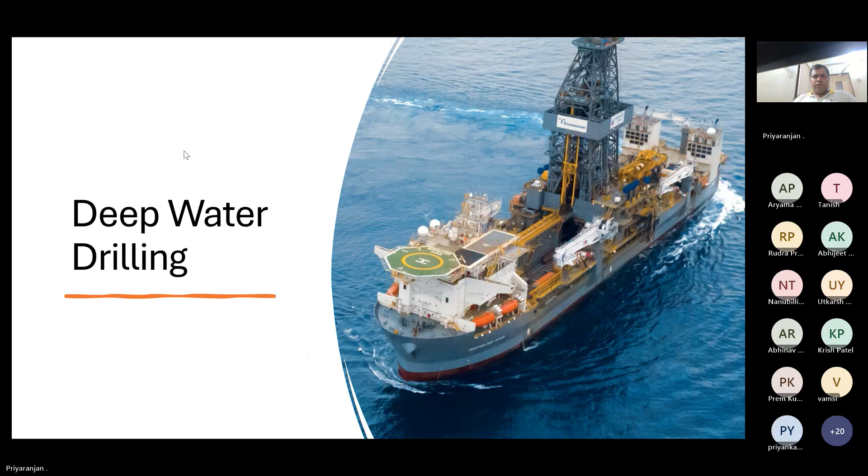So types of drilling rigs. Basically, deep water drilling is more about the rig. The rig itself is something to explore. The types of drilling rigs: we start from the land rig, then drilling barges, then we have jackup rigs, semi-submersibles, and drill ships.

So jackup, drilling, and the land rig. Jackup and land rig are both fixed structures. So we are drilling from a fixed structure, from the land or the jackup rig, and jackup rigs are sometimes attached to the platform as well. A well from a jackup rig and a land rig are almost identical, so there is not much difference between a well drilled by a jackup rig and a land rig.

But there is a limitation with the jackup rig: it cannot operate beyond 500 feet of water depth, because you cannot have so much length of legs of a jackup rig to get support from the seabed. So when this limitation comes, we go for the floating rig. With a floating rig, we have the option of semi-submersibles and drill ships.

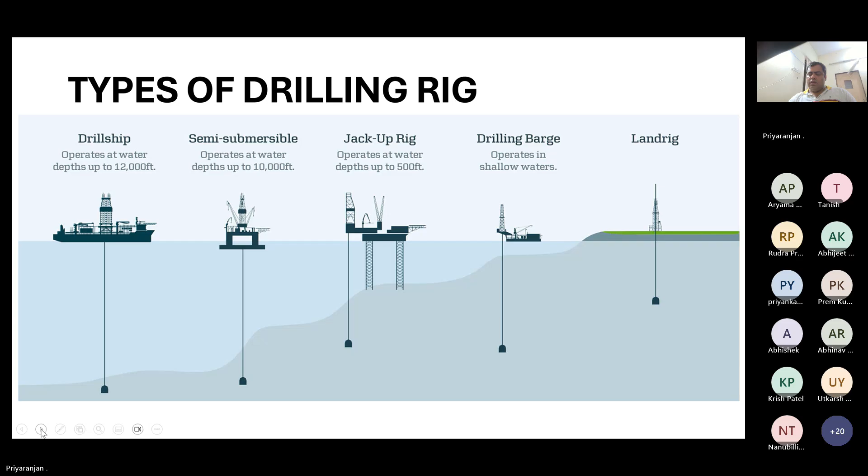So when you go for a floating rig, sea state is not something static, right? Sea state is always in some motion. If you have gone to some beaches, you must have seen the tide and the regular waves that come on the sea beach. So you can see the sea state is not steady always, and with tide also the sea level changes.

You know there is high tide and low tide. So if you have a floating structure on a seabed, that floating structure will not be static. In high tide, it will be at a very high level from the seabed, and at low tide, it will be at some lower level. So it is never at mean sea level, right? That mean sea level is something in between the high tide and low tide.

The tide changes with time, but tide is a gradual thing—it will change over like 5 to 6 hours of the day. But beyond that, one is tide, and after that, whenever the ship is floating, you have the heave motion of the ship.

The heave motion is very predominant, and for this only we have to make so many arrangements for drilling from a floater rig. Heave motion is the motion in the vertical direction—you can see the up and down motion. So heave motion is a continuous motion. Whenever the floating rig is at the field, it is moving up and down continuously. And if you have a well at the seabed and your ship is moving...

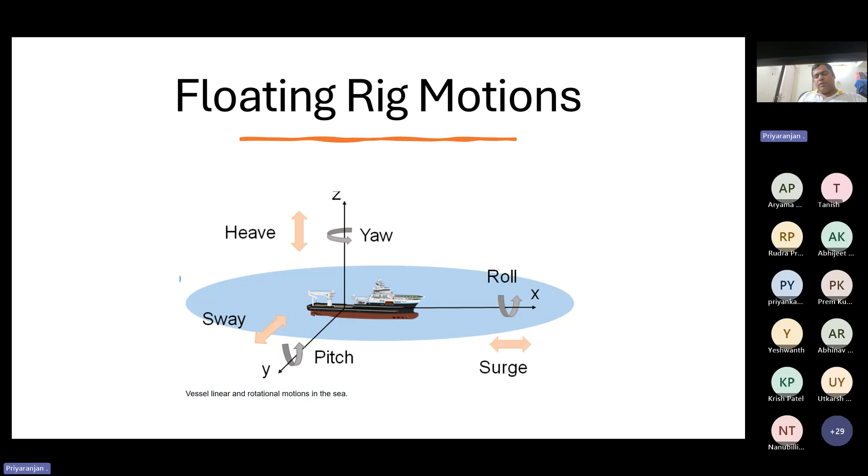Okay, so station keeping for floating rig. In a sea, you always have sea current and wind. So if you just have a ship on a seabed, and if there is a very strong wind, that wind itself can push the vessel away from the position. So to hold that rig in position, because we are drilling at a single point, the well at the seabed is like a single point where we need to be centered. So that is a very tight requirement from our side.

So to keep the drilling rig in a static position, we need to have some forces which can hold it tight. So there are two methods for station keeping: one is anchor moored and another is dynamic positioning.

For anchored mode, we have anchors in place, like solid ropes and chains tied to the rig, and that is called the anchor moored rig. The other is dynamic positioning. In dynamic positioning, you have thrusters that are constantly running, like a fan with a motor, and that gives the force to keep it stationary.

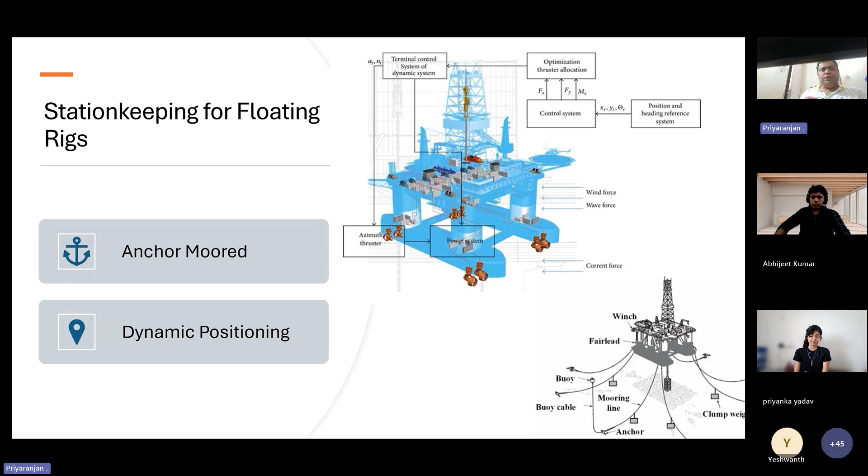Okay, so this is just a video from YouTube. Just let me know if the sound comes through.

Sir, the sound is not coming. I think there is some issue with sharing. Sound is not coming now. Okay, I will reshare it.

It's not asking me also. Okay. I will try once again. Let me know.

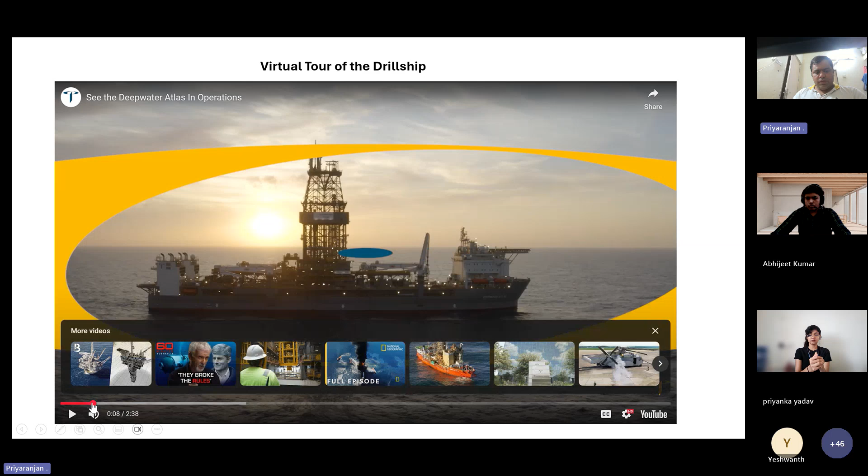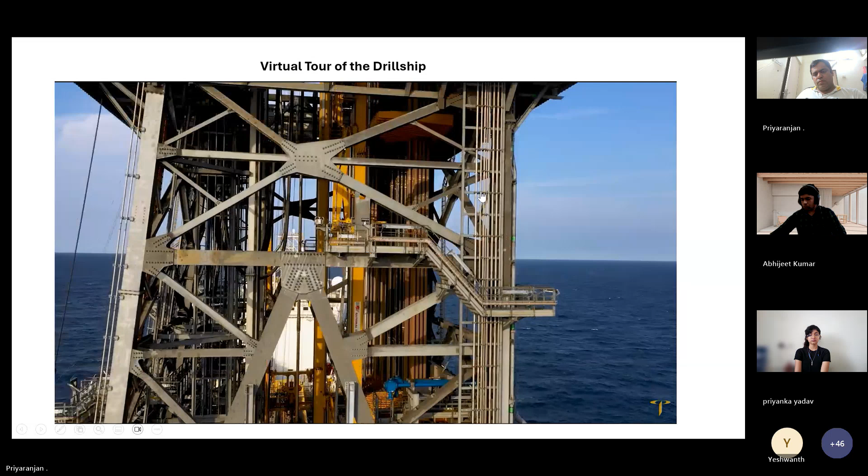Yes sir, it's perfect. I think the anticipation is finally over. You were excited to get on location and perform your job, do what the ship was built to do. The Deepwater Atlas, really special ship, the first of her kind, 8th generation. Things a lot of people know, the 3 million pound hook load, the 20K. You've got excellent power generation, so really it is the best, most advanced stuff in the world right now.

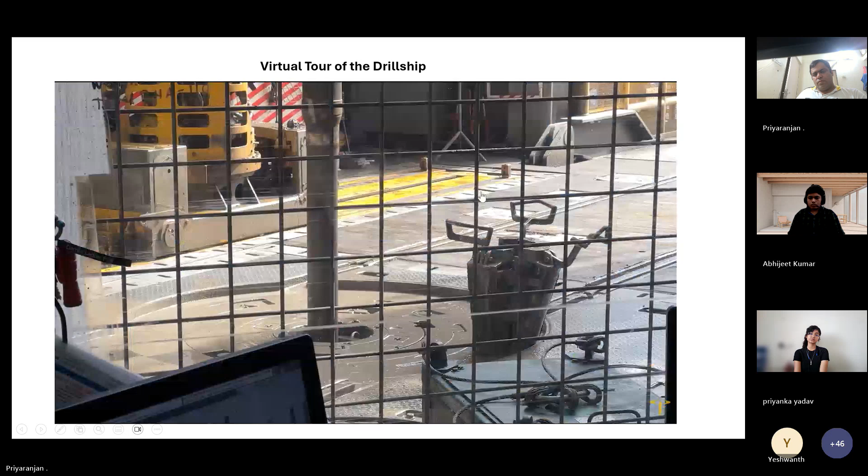We're currently on the Shenandoah project. Once we finish these 4 wells, we'll swap out BOPs and come complete them with our 20K BOP. First in the industry, gotta lead the way.

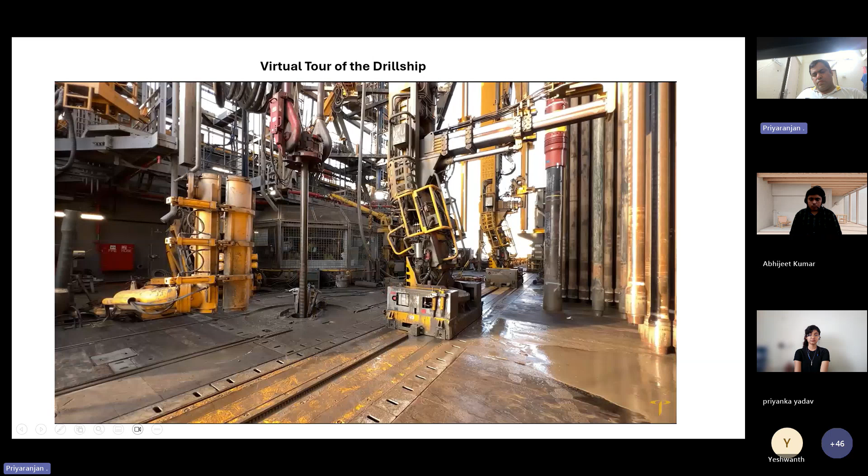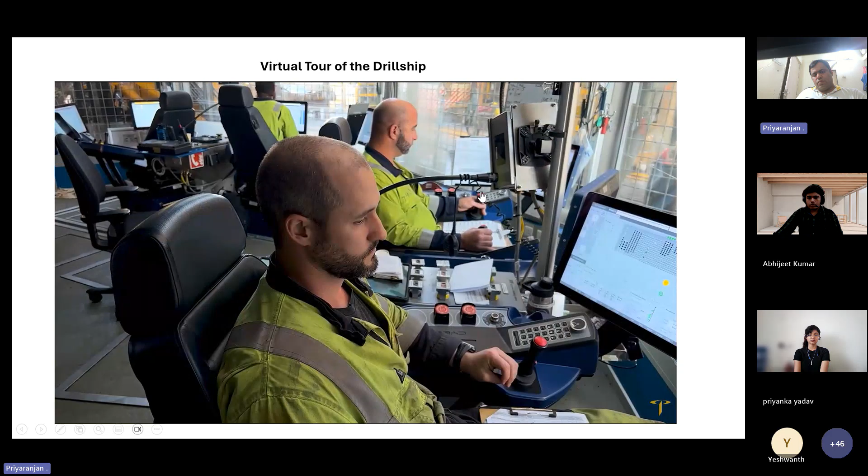It's just really rewarding to be part of it early, before it left the shipyard, and then coming into operations, you can see what the ship can do and really put your hard work to purpose now. It's a real good feeling to actually put it to work and see the years of hard work. There were years of work before we got here, and to see that come together and see the pride that people have in it is really cool.

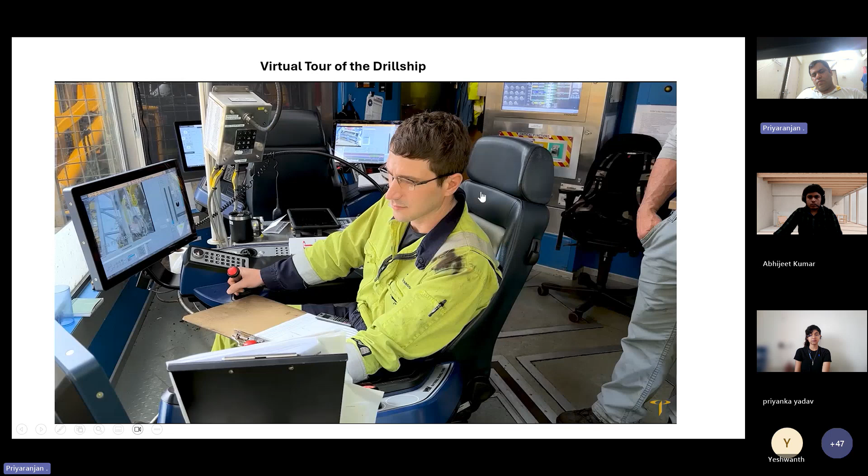You should take a lot of pride in being what is referred to as a plank owner. You were one of the original crew members when it came out of the yard. To see it operate the way it's supposed to run is, yes, very... you can always look back and say, I did have a part of that.

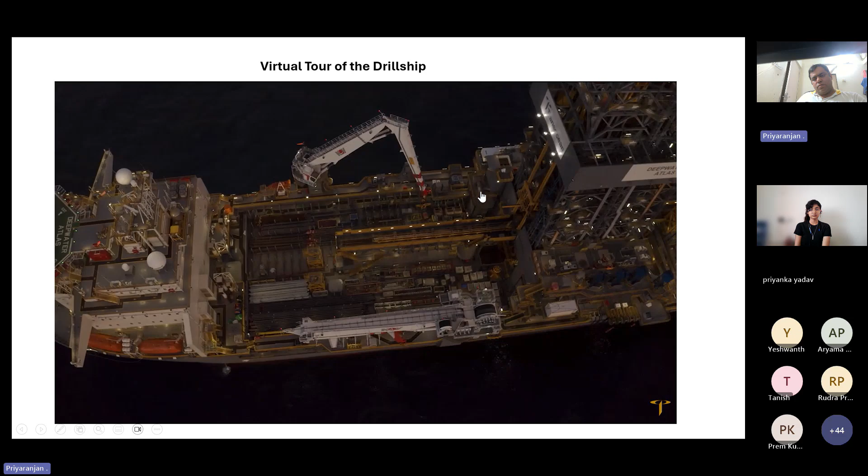A new rig, it's not like a new car. It's not like you pull up, drive it off and show it off. There's a lot of work into it. You can have all the technology in the world, but it takes the right people to really show it off. And I think the Atlas has that right people.

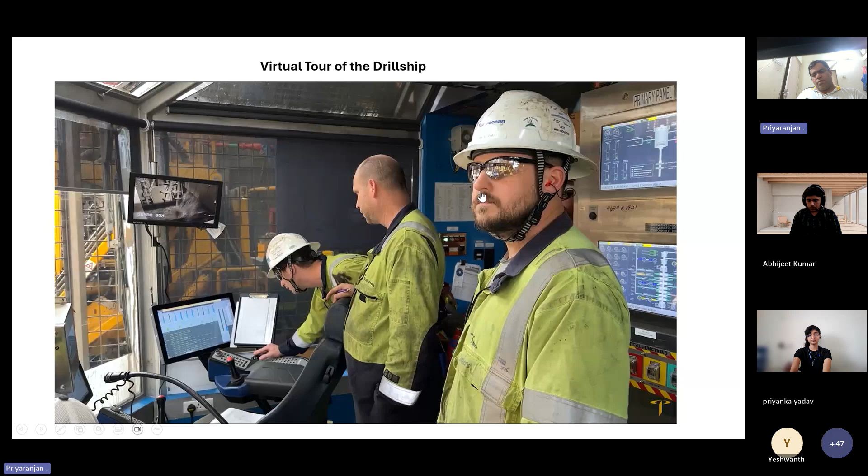The camaraderie of everybody working together, and when I mean everybody, I mean from the engineering side to the drilling side to the marine side. That's a big thing about the Atlas right now, and I'm very proud to be a part of that. I think we have absolutely assembled a team that's procedurally driven, safety oriented. I couldn't ask for a better crew.

This is our ship. We work for the best drilling company in the world, and it's our time to shine.

Okay, so you can have an initial look of a drill ship, right? In the previous video you could see some view of a rig, how it looks like offshore drilling rig. You might have seen a land rig, but going offshore itself takes many trainings. So before you come into the industry, you cannot actually go on a drill ship, because going offshore you need some training.

Only then can you go offshore. So you can watch some videos and be familiarized with what deep water drilling is. And if you see, deep water drilling is using the best of the technology. All the information is available on the internet, but the only thing required is time. So I believe that is why I am here, to give you some idea of how deep water drilling is working. Okay, so this is a description of a rig.

A deep water rig, and you can see for a rig the basic equipment, the core philosophy is the same. We have to drill the hole from the subsurface, from the earth, remove the cuttings and deliver a usable hole for hydrocarbon production.

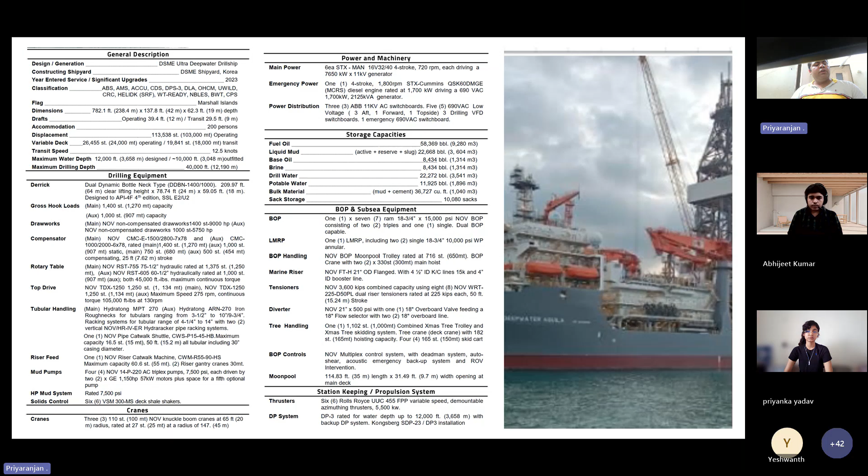Okay, let us move ahead.

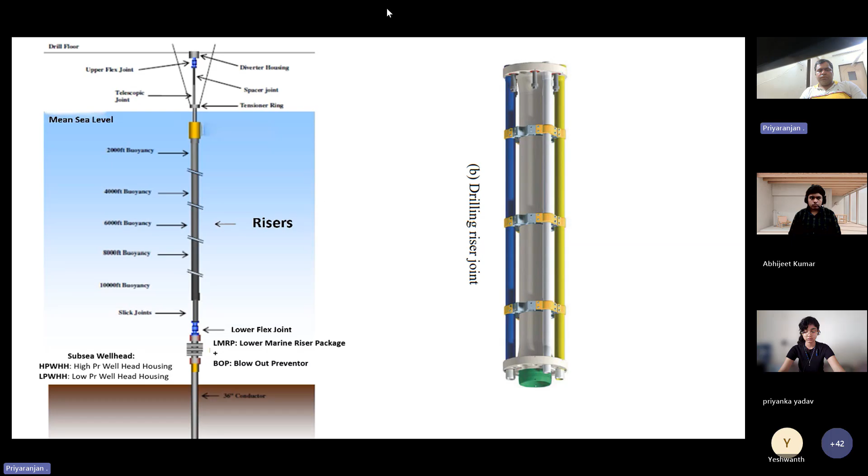So have you seen any land BOP? Vijit, you can answer. Have you seen BOP, blowout preventer? Yes sir, the onshore ones we have seen. Onshore ones you have seen, right? And this is the subsea BOP.

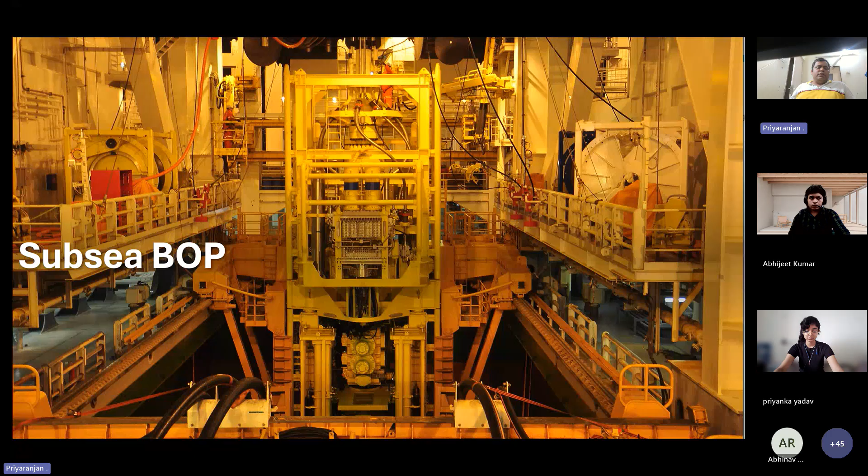And from that to that opening, all the operations of running BOP and risers happen. So right now this BOP is at the cart, and either it will be moved to the center and a riser joint will be connected, and then with the riser joints it will continue to be lowered. So this is a subsea BOP.

Okay, and what are the functions of a BOP? You already know what the BOP does. So the BOP, in case of any failure of the wellbore barrier, like if the hydraulic fluids are not able to hold the formation from coming inside, then we have to close the BOP. So that is the normal function of a BOP.

But other than that, there are other functions as well in the BOP, specific to the subsea BOP. So there is one emergency disconnect sequence. There is a button on the rig floor, and even at the tool pusher office, and even at the bridge. The bridge is the central command of the drill ship, the marine side of it. So from the bridge also, if the captain sees any problem, they can initiate this emergency disconnect sequence.

So the emergency disconnect sequence is manually activated, not automatically activated. A button has to be pushed, and if that button is pushed, the disconnect sequence starts and the wellbore is secured and the LMRP is disconnected from the BOP. There can be many situations where we have to push this button, and the EDS sequence is specifically decided based on what kind of tubular is in the hole. You will learn that later. But first you just need to understand that there is an EDS sequence, which we call emergency disconnect sequence.

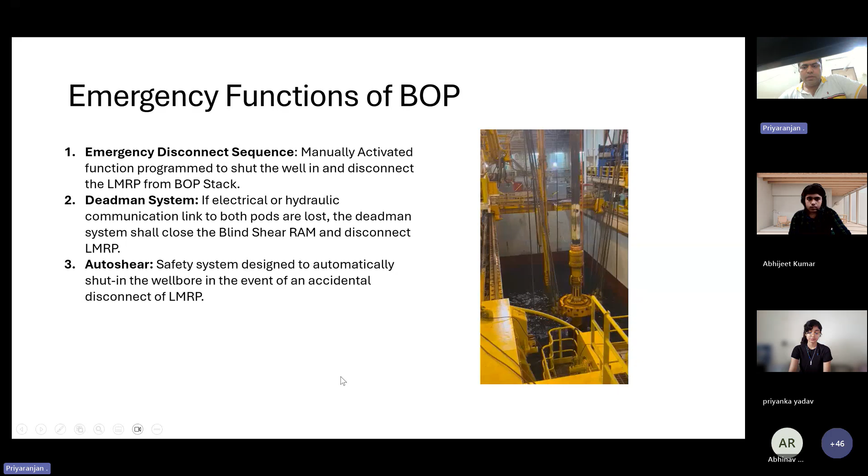So this is the slip joint that you saw in the previous video, also called telescopic joint or slip joint. The rig's heave motion and static riser joint is interfaced using the slip joint and MRT system. The marine riser tensioner takes the weight of the riser, and there's continuous movement at the interface, because the BOP and riser are static - the wellhead is at the seabed so it's not moving, only the sea level is in motion. Because the ship is in motion while the BOP and riser system is static, we have a telescopic joint to interface the static system and the moving system.

And these are the riser joints we were talking about. I already explained what riser is - it's something that is above the BOP and comes all the way up to the surface. Riser is 21 inch OD, and generally this is the general size: OD is 21 inch and ID is 19 inch. This is a very big bore size for the well.

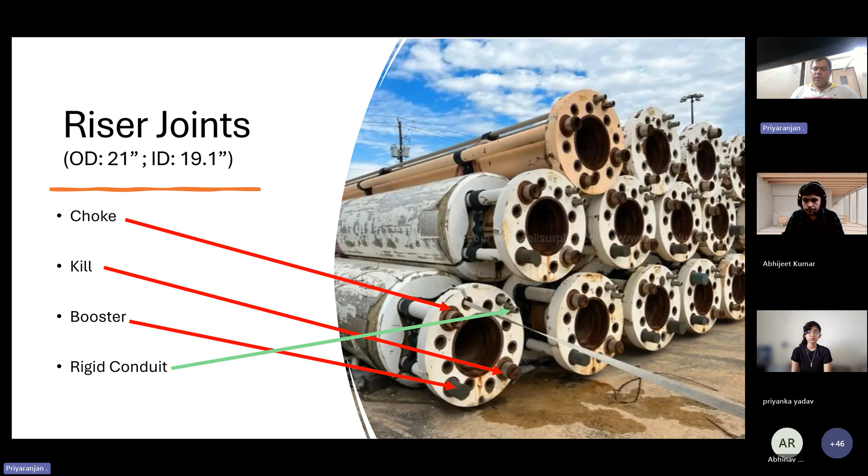If you're drilling with a drill string and your ship is in motion and you touch the seabed or any formation, if your ship is coming up and down, it will give a very hard bang on the surface if you do not compensate the ship's heave motion. The power of heave is very strong. It can break anything.

To compensate that and have uniform weight on bit, we have the compensation system called the drill string motion compensator. The basic principle of the riser tensioner system and drill string motion compensator are the same, but these are the two parts where we need compensation, for the drill string and for the riser. In this video I can show you how it is.

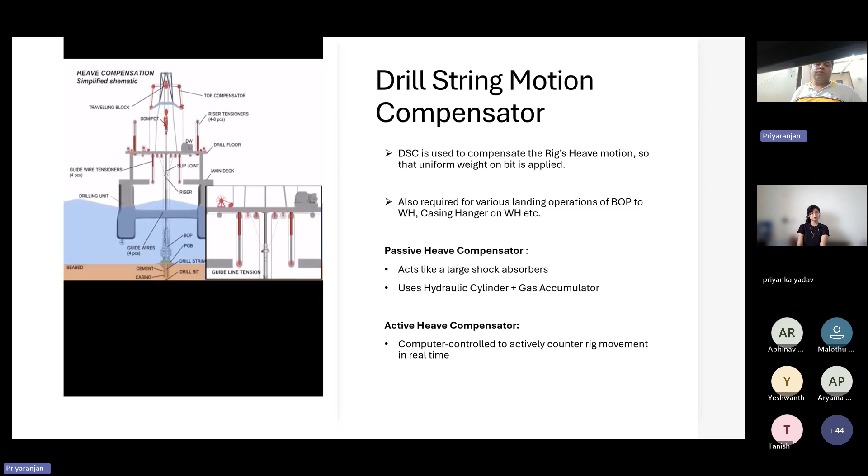This is specific to deep water drilling, because when you go for a jackup or a land rig, you do not have a situation where the ship itself is moving or the rig itself is moving. You do not have a system like that on a jackup rig or a land rig. But for a deep water floating rig, we have these challenges.

Okay, so this is another video. I will not play it fully.

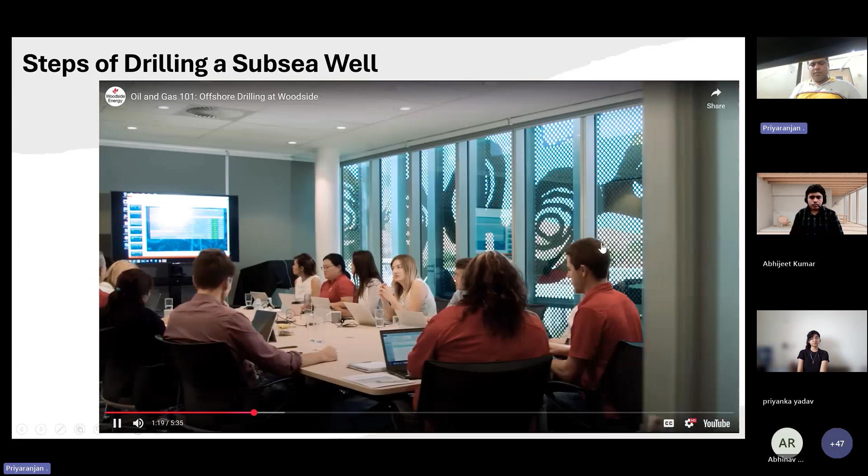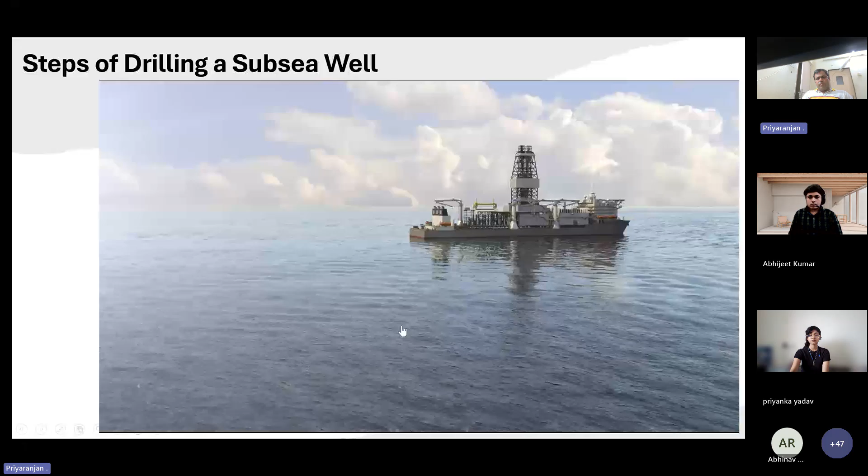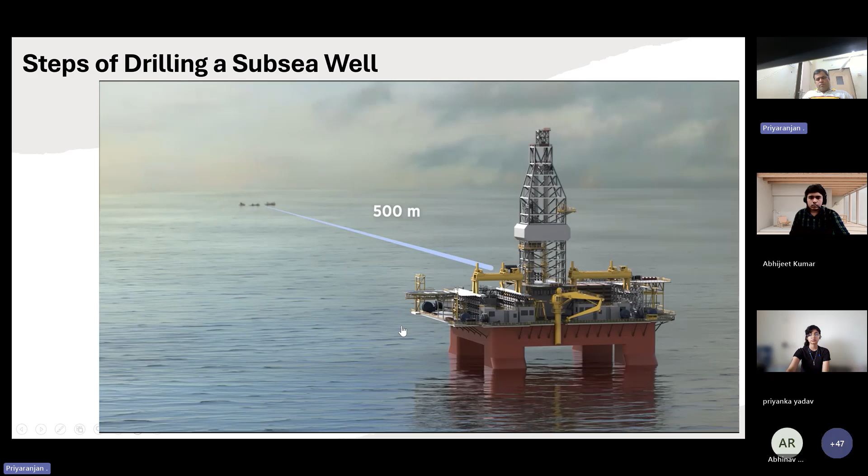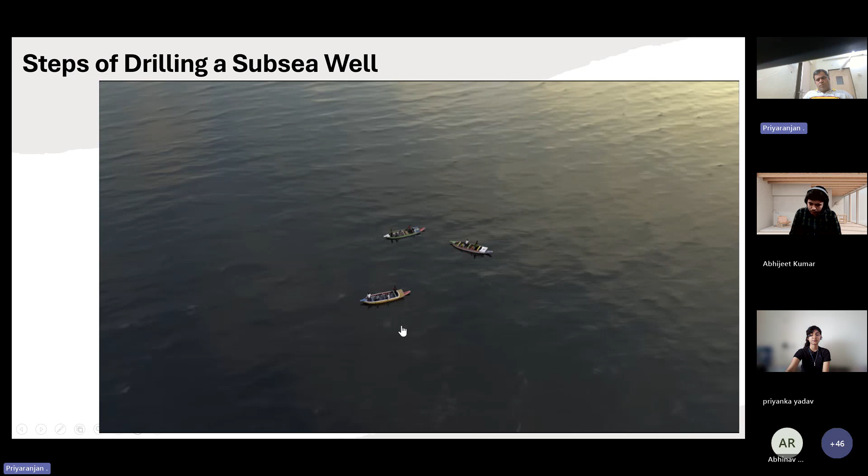Wells can be drilled by either a drill ship or a drill rig, known as mobile offshore drilling units or MODUs, depending on water depths and other factors. To ensure the safety of other marine users, vessels not involved in drilling should stay at least 500 metres away from the drilling location while in operation. This is called a safety exclusion zone. Once the well is complete and drilling infrastructure is removed, marine users are generally free to resume normal activities.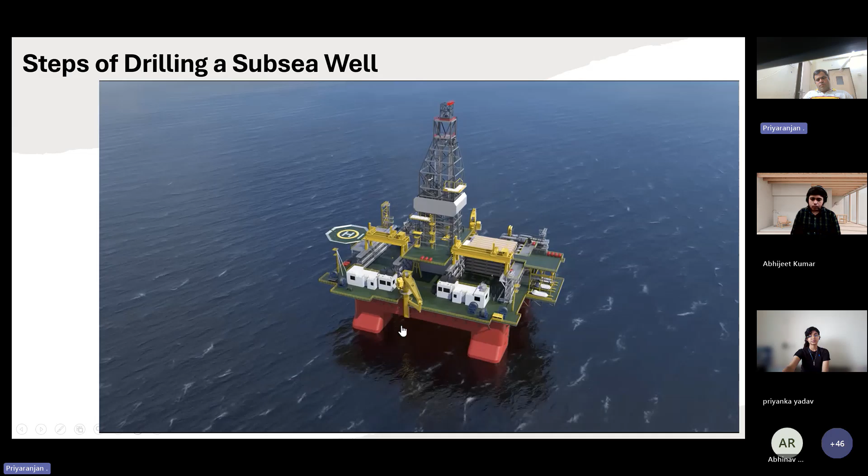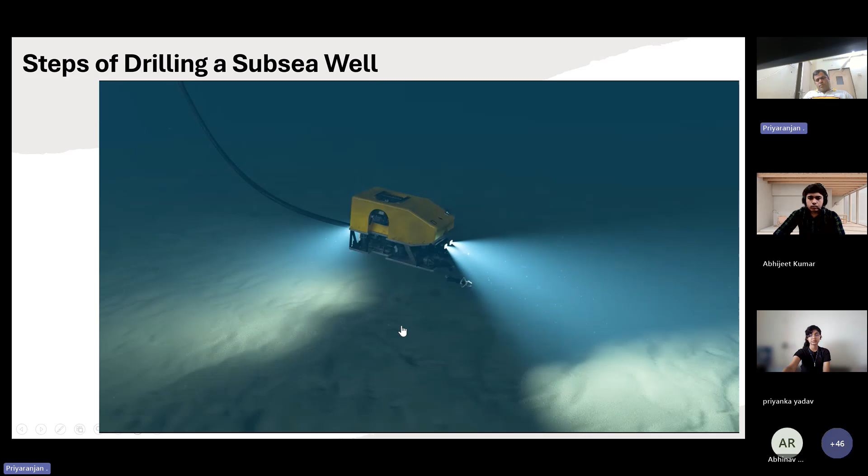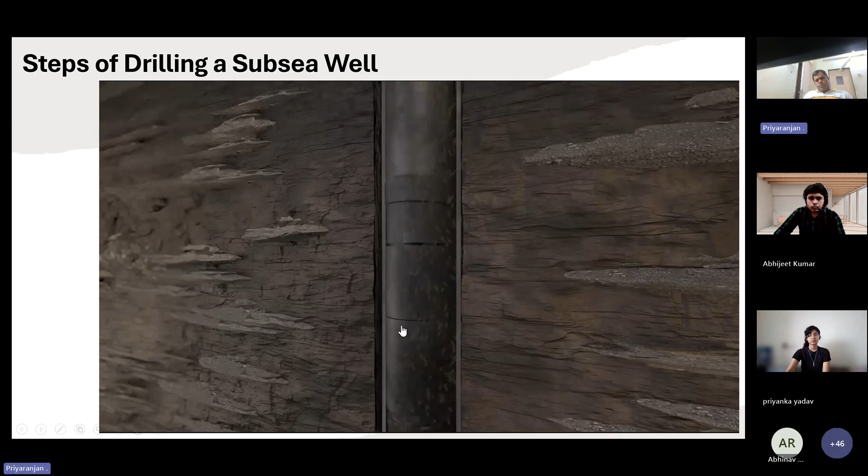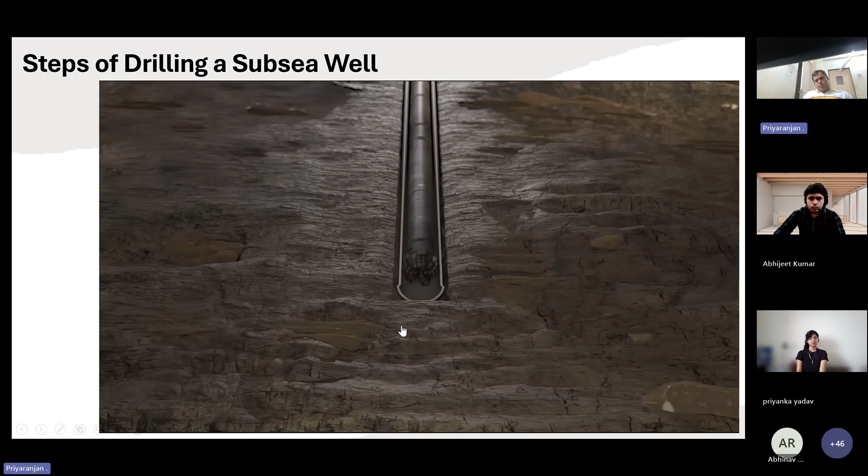While technical differences exist, the process for drilling all offshore wells is similar and takes place in several stages. Before any drilling, a remote-operated vehicle, or ROV, is sent to assess the condition of the seabed. A hole is then drilled into the ocean floor using a large diameter drill bit, and steel pipe called a conductor is installed, providing the well's initial structural support. A smaller drill bit is then lowered through the conductor to drill the next section, called the top hole. Once it reaches a predetermined depth, more steel pipe called casing is installed, supporting the newly drilled hole.

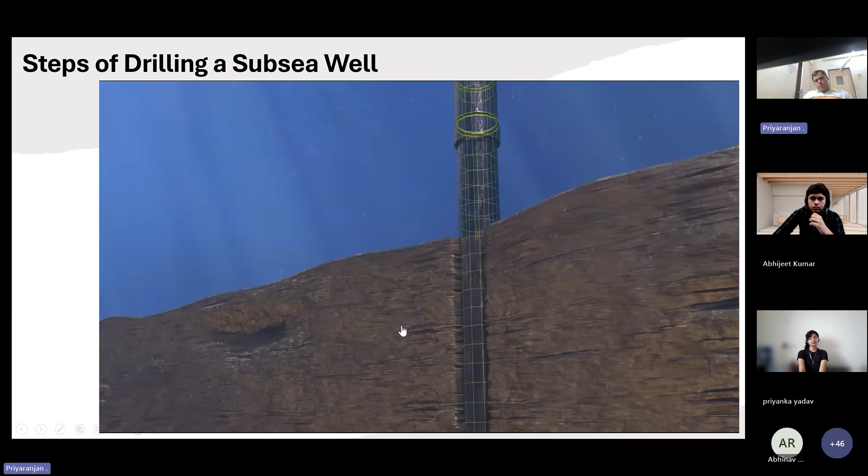Cement is pumped through the casing, moving between the casing and the drilled hole, securing it in the ground. The cement is allowed to set before drilling continues.

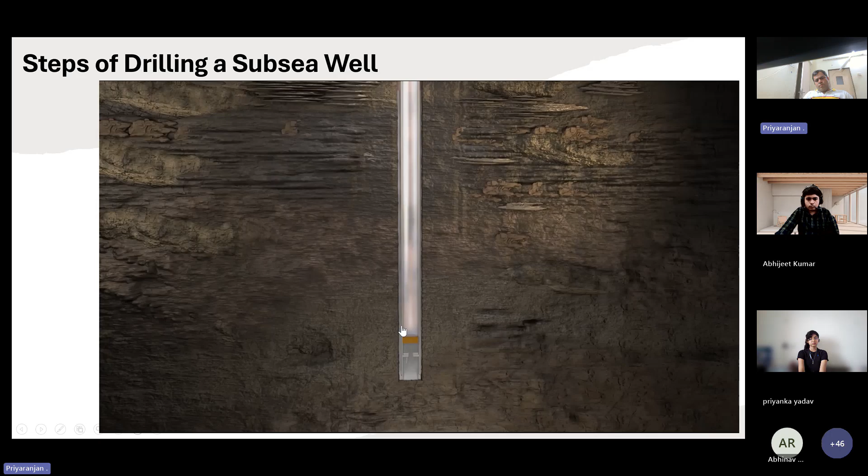Before drilling deeper, a blowout preventer, or BOP, is installed on top of the well. The BOP is a large, specialised safety device used to seal, control and monitor wells to prevent uncontrolled release of fluids.

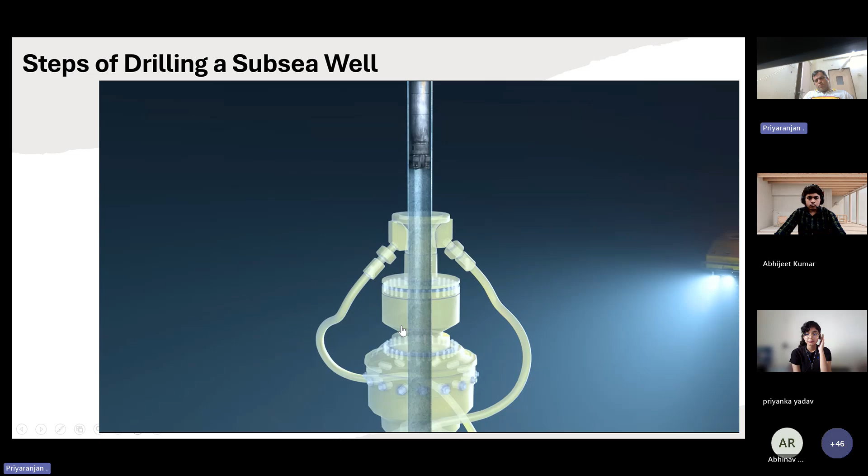After the BOP is secure, a smaller drill bit is lowered into the hole to drill further, and more casing is cemented into the ground. This step is repeated until the well reaches a specific depth where the targeted reservoir is predicted or known to be.

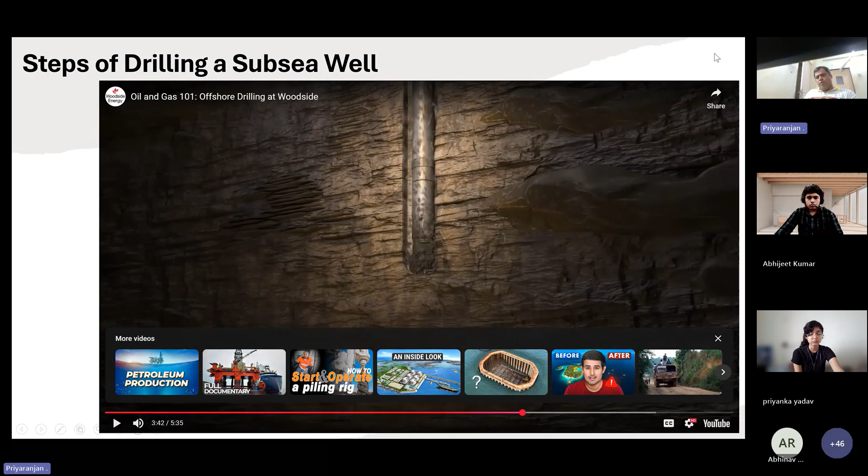Okay, so that was some view of how the ROV is working and how the BOP is latched to the wellhead, just to have a feel of it.

Another important technology for deep water drilling is the subsea wellhead. The subsea wellhead system is very different from what you see onshore or in other wells. The subsea wellhead system has two parts: one is low pressure housing and another is high pressure housing.

The low pressure wellhead housing is run with conductor casing, like 36-inch or 30-inch casing. On top of the 36-inch casing is the low pressure wellhead housing that we run. After that, we run the high pressure wellhead housing, which is run with the 20-inch casing, and it lands on the low pressure wellhead housing.

After the high pressure wellhead housing is latched onto the low pressure housing, the BOP is run and then latched to the high pressure wellhead housing. Up to this point, the BOP is not connected and all the drilling is being done riserless.

After the high pressure housing is latched to the low pressure housing, further casing comes with a casing hanger, and sequentially the casing hanger lands in the high pressure housing. This is called the integrated wellhead as well. All the casing hangers land inside the high pressure wellhead housing, one after another.

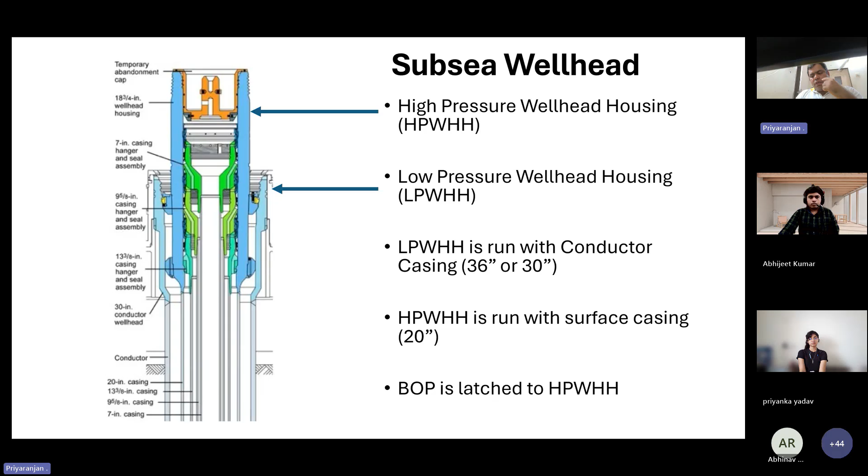So we just talked about the low pressure and high pressure wellhead housing. Up to the installation of high pressure housing, all the drilling is called top hole drilling. This top hole drilling is riserless drilling - there is no riser, no return to the surface. Everything you pump is going to the seabed.

So the steps of top hole drilling are: we drill a 42-inch hole and lower 36-inch casing.

This is one way, but a more frequent way is you run with a 36-inch casing and a 26-inch bit that is coming just outside of the casing, and you jet the 36-inch casing into the seabed. You pump at a very high rate, and because the upper soil is very soft, you can jet the 36-inch casing up to like 70 to 90 meters below the seabed, which is called the mud line also. So you jet the casing down to that depth below the mud line, and give some time for soaking of the casing.

We have a drill-ahead tool in the running tool system. So you wait for soaking and then continue drilling the 26-inch hole from that point itself.

One point you may not have noticed is that for ultra deep water wells, we have like 2,000 to 3,000 meters of water depth itself. To trip that 3,000 meters of drill pipe takes too much time. A 3,000 meter well on land is considered very deep, but if you have 3,000 meters of only water, the tripping time is very substantial. So if you can save some time in that, since the cost of the rig is very high, we have a system for that.

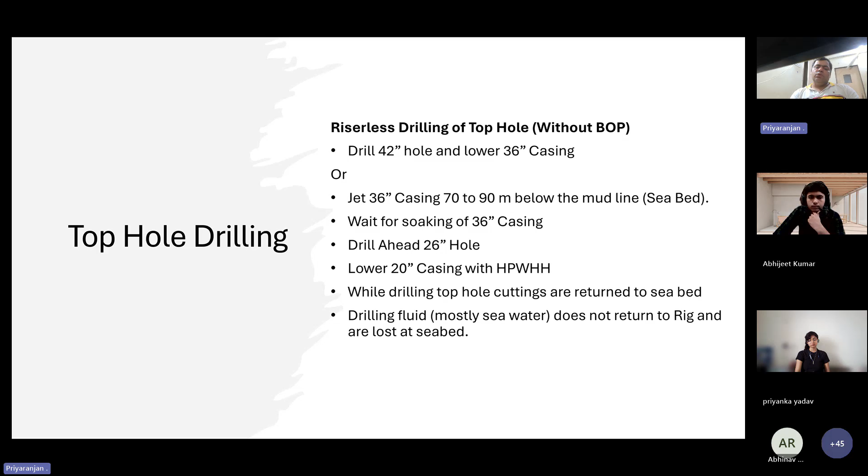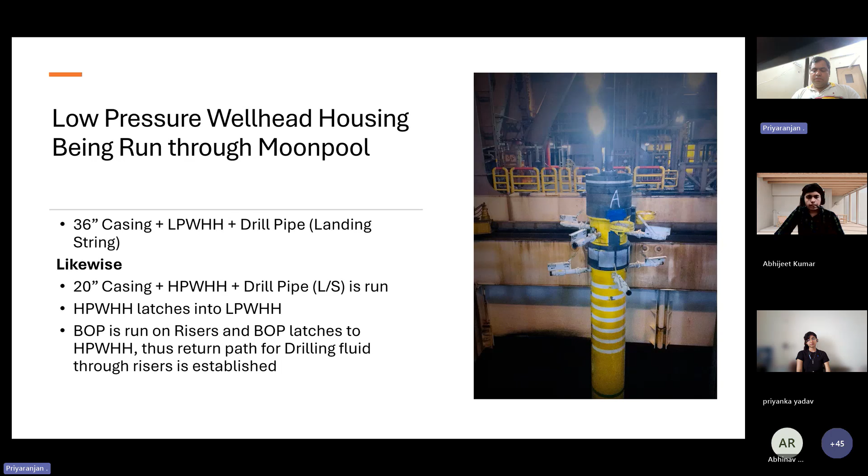Intermediate casing, production casing, and liners. So after you drill the top hole, the other operations are very similar to normal wells. Almost similar, still not the same, but you connect the riser to the BOP and to the rig, and you have the return system also. Your pumping and everything is coming to surface through the riser. So it is almost the same.

After the high pressure housing is latched onto the low pressure housing, the further casing hangers are landed on the high pressure housing. That is what I'm talking about here. And the liner hanger, you might be knowing, is what does not come all the way up to the wellhead. There is some overlap with the previous casing, and it is hanged to the casing itself. That is called a liner.

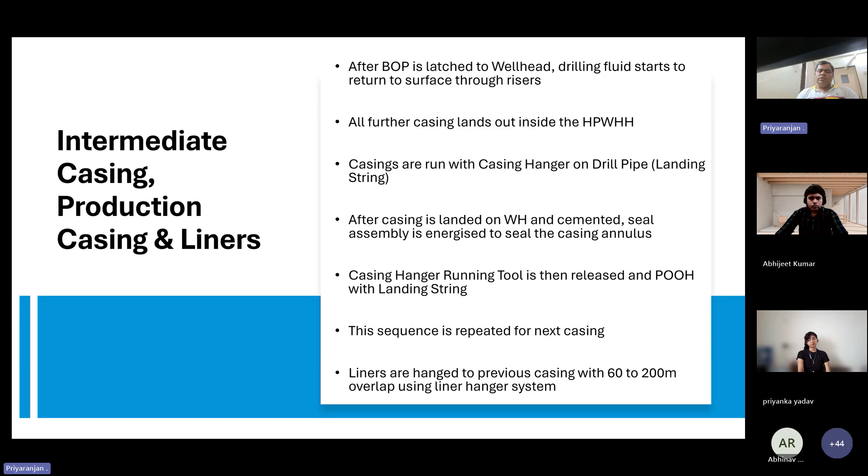Wireline logging is the general procedure. For each hole you drill, you record the wireline log, and based on that you evaluate the formation and the petrophysical parameters of the formation. For exploratory drilling this is very important. Even for development wells we record wireline logs to confirm whatever we thought is as anticipated. So the wireline logging is done, and since deep water drilling is most of the time exploration, wireline logging is very important for us.

That gives us the result of what we have got, what we have drilled, and what we expect, and whether we need to test the well or not. So we drill the well to find hydrocarbon, and to establish that there is hydrocarbon, we need this wireline logging.

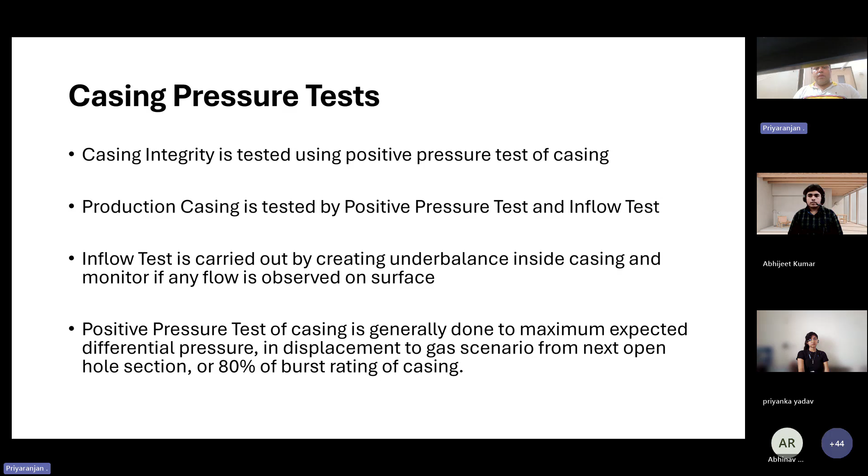This is a specific problem for deepwater drilling - shallow gas, which I already talked about in top hole drilling. Up to the surface casing, that is the 20-inch casing, we are drilling riserless, so there is no BOP, there is nothing to hold the pressure. If some high pressure zones are encountered in the top hole section, there is no mechanism to contain that because we do not have a BOP there.

All we can do, the maximum we can do, is pump high weighted mud into that well. But that is the only defense we have. And if a very large pocket of shallow gas is encountered in the top hole section while drilling riserless, there is a possibility that even the buoyancy of the water may go down, and there is a chance of the ship sinking. That is a very rare phenomenon, but it may happen.

If a very large pocket of shallow gas is encountered, the only option left for the rig is to move away from that location, because you cannot contain that immediately. If you could contain it, you would have already done so by pumping the high weighted mud. But if it is not possible, the ship has to move away from the location. That is called shallow gas.

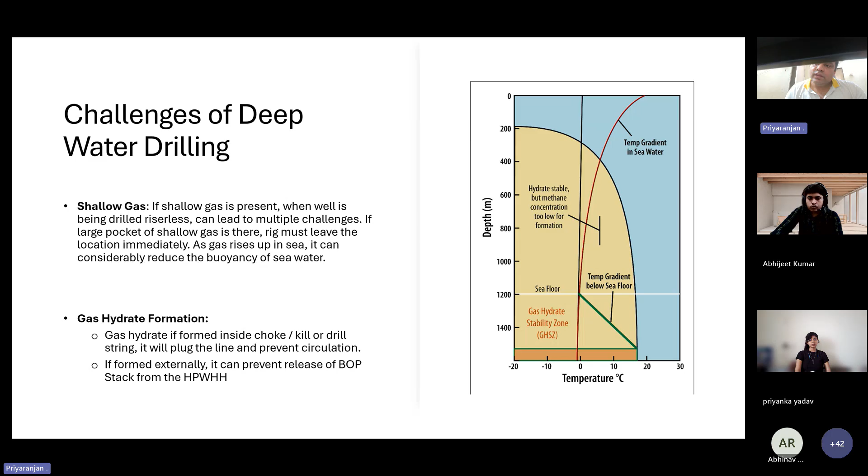Another part is well testing. So if you drill the well, you need to test it - that is called drill stem testing, and we do that for all other wells also. But because in deep water we are mostly doing the exploratory well only, well testing is the integral part of deep water drilling. So the final result comes from the well testing only.

But when we are testing a well, we already discussed that the ship is in motion and can disconnect anytime, and we are isolated at some remote location. All the hydrocarbon is coming to the rig, and that is where you live - 100, 150 persons are staying on that rig while hydrocarbon is flowing on it. So there has to be a foolproof method to contain the system, contain the hydrocarbon whenever required at any point of time - with a click of a button, everything should shut down so we can handle an emergency situation.

So for well testing we have different valves that we can set at the downhole reservoir level, at subsea level, at surface level, at the flow head level. There are multiple valves, and most of them can be operated remotely as well, so this is a very safe system. Although this is very risky, the industry has already found a solution for that.

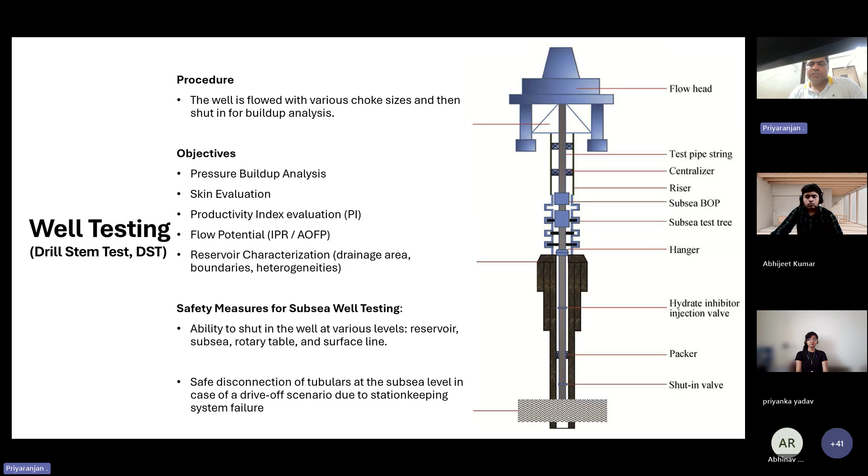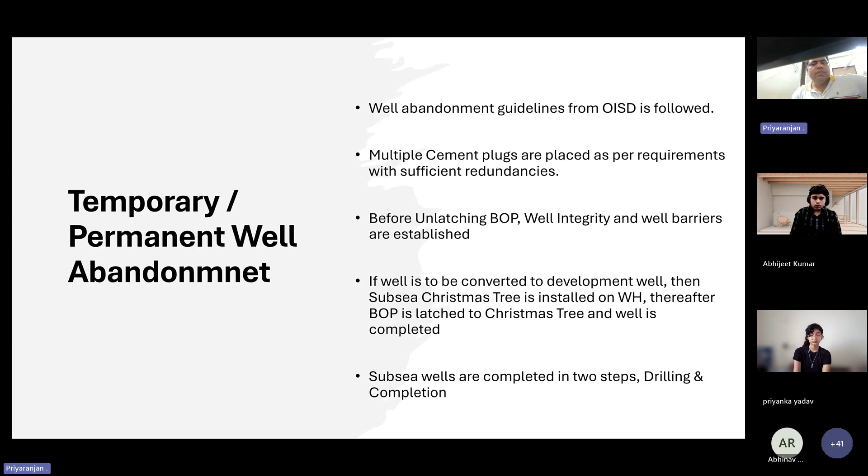And when you drill the well, before leaving it you need to abandon it so that hydrocarbon flow is not there when you leave the location. So when your drilling completes, we place different cement plugs, and after that the BOP is unlatched from the wellhead and we can leave the location. We ensure that there is no hydrocarbon that can flow from the well by placing cement plugs - that is called abandonment.

And this is the subsea field development, how it looks like.

So most of the times we are doing exploration, but if we get success in exploration, then we drill the appraisal wells. And with appraisal wells, if it looks like the economics is favorable, we can develop the field.

So to develop the field, we need to have a separate planning. Subsea field development is a whole new domain and a whole big domain. Multiple companies are operating, and this is a very advanced system that the industry has already found the solution for. This is something where multiple companies are working in this area for subsea field development. This is a very huge teamwork, and that is what we do, and this is the final outcome that we desire.

This whole operation from drilling to development to getting oil and gas takes minimum 5 to 10 years. It takes that much time from exploration to exploitation, to get the hydrocarbon on surface and at economical scale. So this is the final outcome of the deep water drilling, if at all we are successful in that.

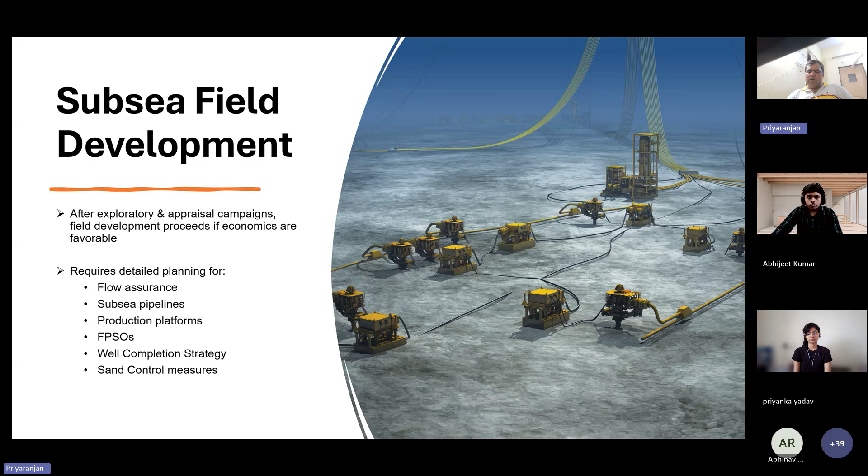So this is all that I had today. So now we are open. I will stop sharing now.